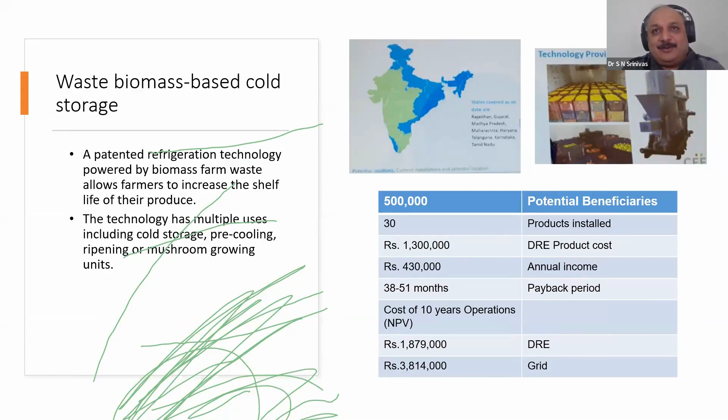There are quotes of 2.5 etc, but I don't want to get into that because that's really a killing price. Vendors will not make the profit. Vendors have to make profit for the product to continue, sustain, and business to prosper. So just killing each other will not help. In my view, it should be 3.5 to 4 rupees per unit of power, not really go below 3. Anyway, that's a different subject matter of debate and discussion.

Solar dryers are another big area because there are 2 or 3 important advantages of solar drying. Number one is you will have a lot of shelf life, so you can negotiate for a significant price increase. Second thing is you don't need energy cost. And most important is apparently it is nutrition rich.

Apparently there are quite a significant number of studies which have cited this. So solar dryers is a big area. Till now, 3,500 solar dryers have been put up.

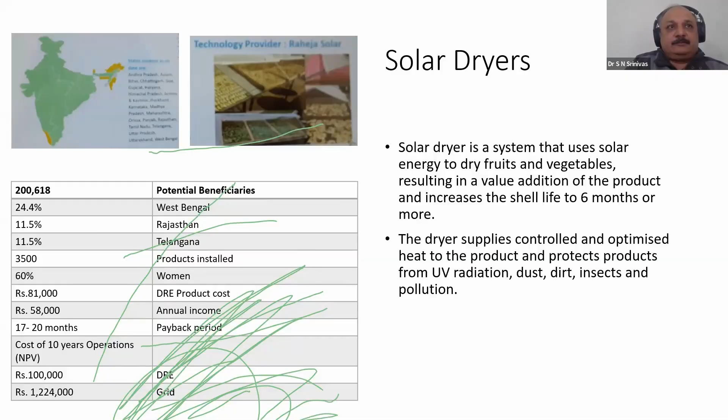Since it is a product typically in the thermal area - heat applications or cold applications - I'm a fan of this because the products are indigenous and fabricated in India and sold in India, which increases the employment opportunity and enterprise opportunity. So what you see here on the left bottom side is a dryer.

On the right side is an interesting thing. I bumped into this company called Trane Technologies. It's a big multi-billion-dollar US-based company which is doing space cooling for Walmart and things like that.

What happens typically is his or her day starts from 3:30 in the morning. They buy it from the wholesale mandi, and they have to sell this produce, particularly leafy vegetables, by 4 o'clock in the evening. Otherwise, it really you will not be able to sell it, and next day definitely it's not possible.

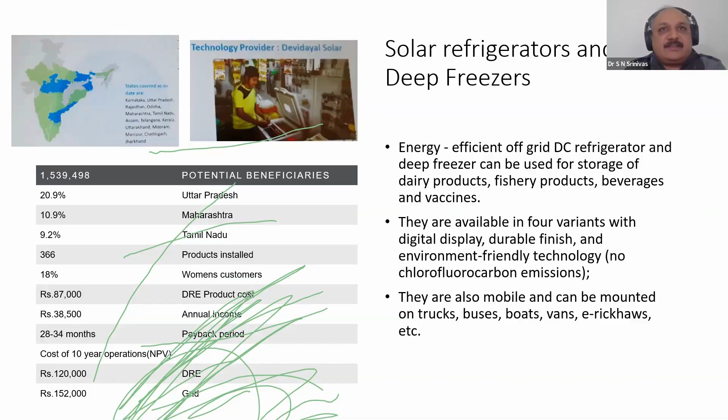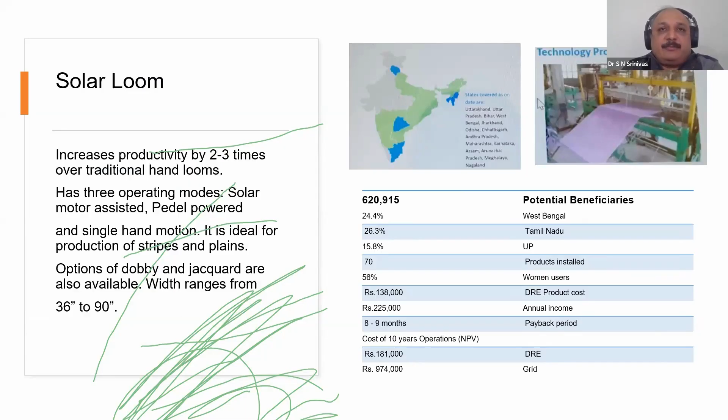Solar looms, we have a number of looms, right? Just Uttar Pradesh, Tamil Nadu, and West Bengal are the big states where 600,000 looms are there, and charkhas are another big number - it runs to tens of lakhs, which also can be solarized.

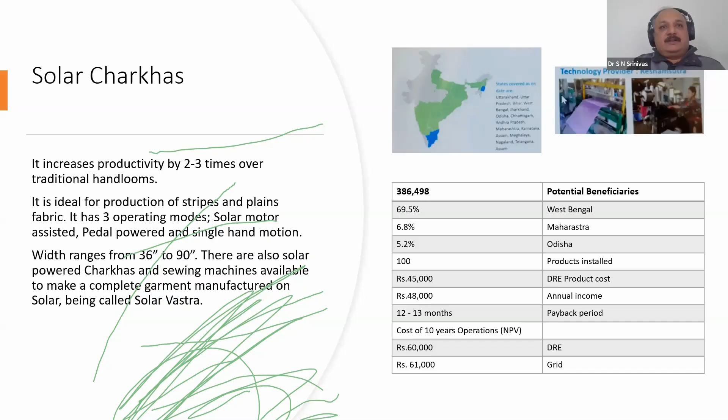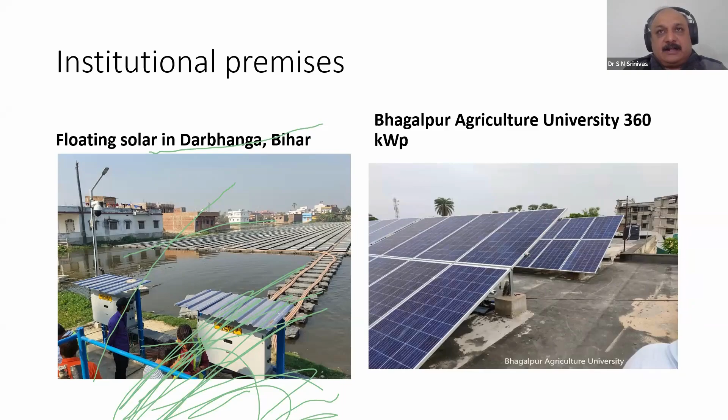If some people want to take up an enterprise, why not do institutional premises - you solarize them to take them to net zero. Or if you have a lake in your area, can we not do floating solar? Because in some areas, some states like Bihar, land is of prime cost, since there are very huge fragmented lands for farming. Given a piece of land, people would like to farm rather than put up solar panels like in Ladakh or in Rajasthan or in Gujarat.

Coming to thermal applications - generally whenever we say energy, we get into electrical. But if you take a look at total primary energy, all energy used, actually the heat applications, all cook stoves or industries using process heat, these together actually are 57%, whereas electricity...

The minute we say energy, we go to electricity. But we must be conscious of thermal applications, and that's where huge scope exists for smaller entrepreneurs, whereas electricity is managed by huge discoms and big companies, whereas heat applications, by nature, are decentralized and need smaller entrepreneurs.

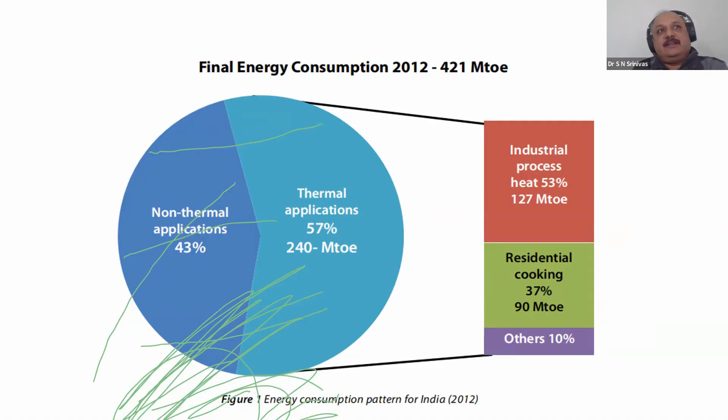India is blessed because of our nature of applications, nature of resources. We have tremendous scope for enterprise and employment around this subject, which is not touched, and also it's like virgin in a way - not much has happened. In fact, I'd say ministries still need to give a lot of emphasis on these applications.

Just take agriculture residue - we have a surplus of more than 250 million tons, and each entrepreneur can run a plant which is like 1 to 10 tons per day, so 300 tons per year. So you have so much scope for just this.

Just take the example of Surat. I was involved in a quick survey, making energy efficient boilers, a project through UNIDO. We were examining the boilers - what fuel are they using, what's the current efficiency? Since December last year, that is 2021, they've all shifted - almost 80% of the people have shifted from coal to briquettes.

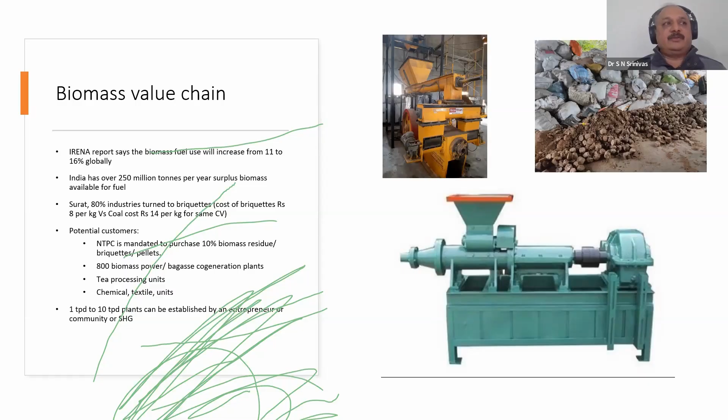Another big area is all that we waste. I would say we should really campaign for net zero wet waste - no wet waste should go from houses.

So yeah, here in Bangalore, one person is selling biogas digesters which take 2 kgs. Typically, a household of 5 or 6 people would generate about 2 kgs of wet waste per day, and if it's 10-15 people, it's 5 kgs. So he has produced them. Wherever there is a little bit of terrace, we should definitely convert either to compost or generate gas and use it to meet our partial gas requirement.

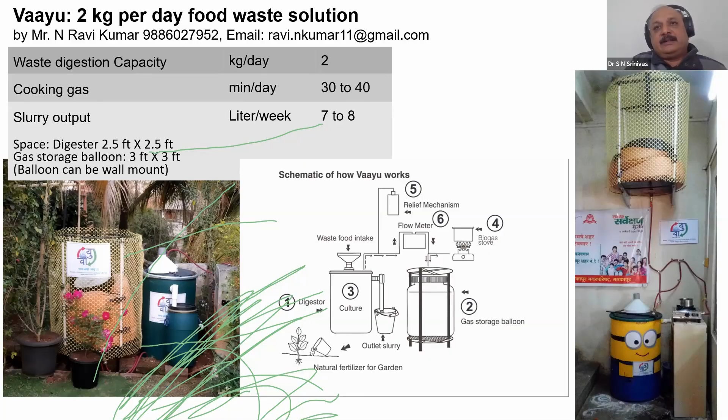Thereby we reduce there also. On one hand, we use the waste, we will not transport it, we will not create another pollution cycle, but on the other hand, reduce our LPG. So these are some of the pictures.

And as I said, improved cook stoves still have a lot of potential, and these are different models. In India, there are 125 different models, but still it's a big challenge, because a stove which is most convenient to the housewife, or whoever cooks for that matter, is still a mirage. So that's how you will see still a 126th model is coming.

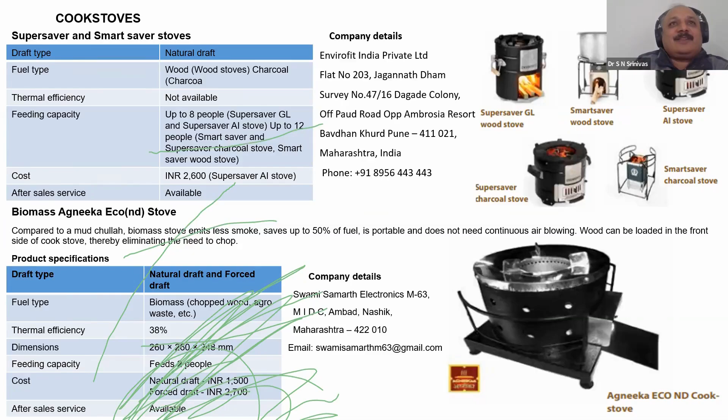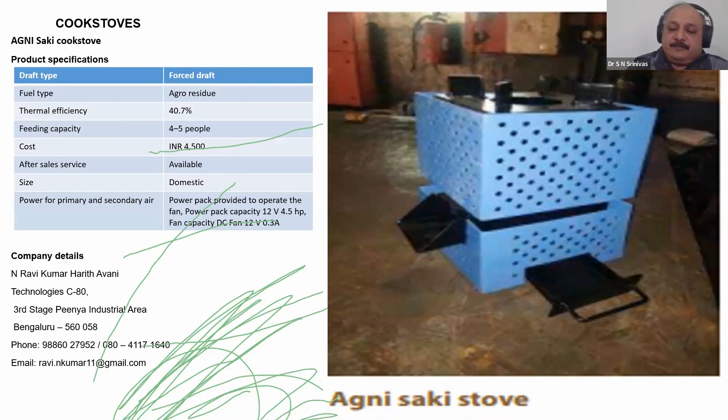And then another area is biomass gasifiers for heat applications. If you see here on the left side, the bar graph, these are a little old, but the ratio holds good. Many enterprises use diesel as fuel, electricity as fuel, wood as fuel, kerosene or LPG. If you use a gasifier, you can reduce it by 50%, and the graph very clearly shows how much you can save by burning the biomass in a reactor like a gasifier.

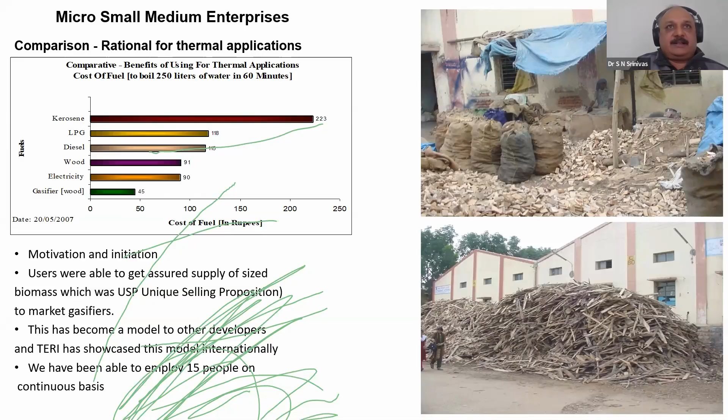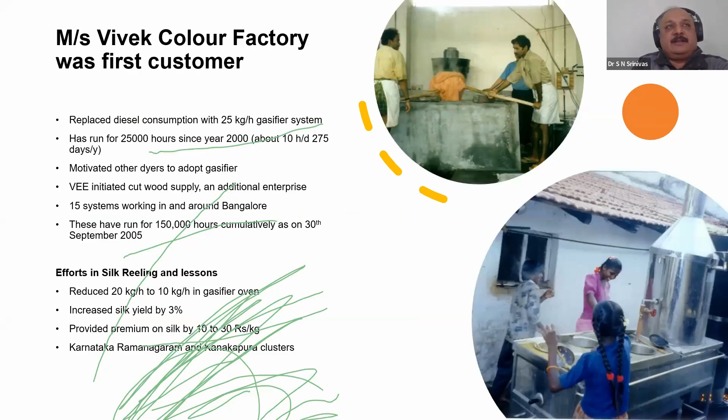Here are some examples in a bleaching unit, dyeing unit, in silk reeling units, where it comfortably reduces 50% of the biomass used. Even in a lead melting unit, condiments making, a series of uses.

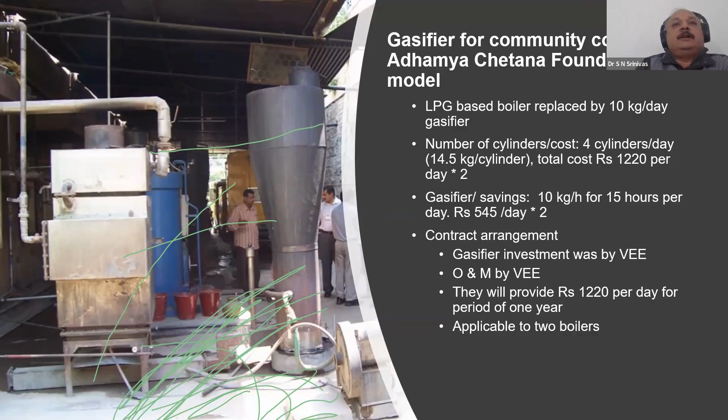In fact, in Adhamya Chetana Foundation, which was run by former member of parliament and minister Ananth Kumar's wife, they tried the first energy service company model, where they will not buy the gasifier, but they will buy the services. So you give the steam which they were earlier getting through the LPG. So you have an agreement to give the steam. So that kind of a service company was also piloted. So I'll skip this.

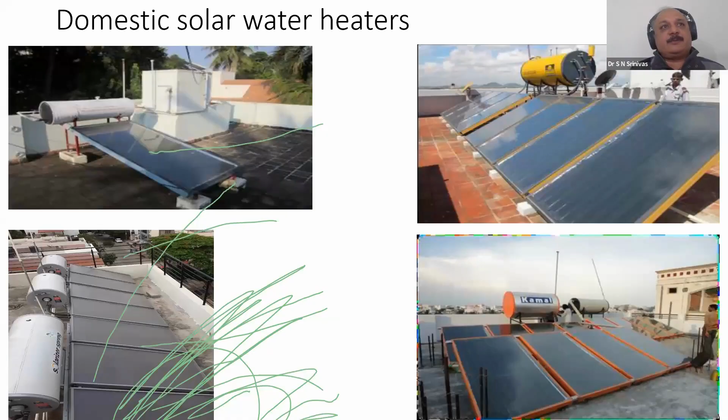Solar water heaters, you all know, but it holds a lot of promise. For example, Greece has 60% of all new installations with solar water heaters, whereas in India, the best is in Pune and Bangalore with just 15%. Greece is much worse in terms of weather conditions. We have much better, but our uptake is as of now so low. That means we have so much potential. It can take up thousands of enterprises and lakhs of people. Just this subject can engage them.

As of now, for solar water heaters in the country, we have just 20 million square meters installed, whereas we have 300 million houses. Each house can have 1 square meter. That means 300 million square meters is the least. And I'm not even counting the 60 million enterprises, MSME units, which can also make use of solar water heaters.

And there was a design also. I was involved in a design for the hilly areas, because they have to carry them as back loads. So this was designed particularly for that, but somehow it did not take off, but there is potential that it can be improved and can take off.

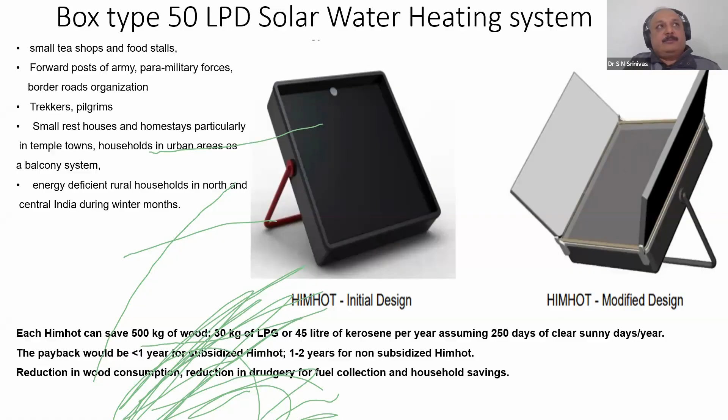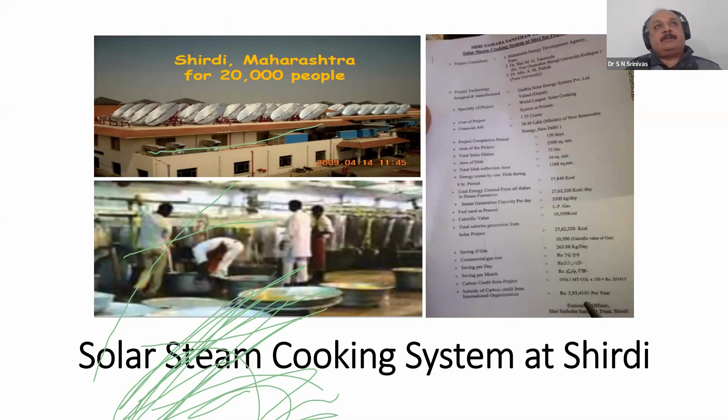So another area is solar concentrators. You would have seen these reverse umbrella shaped things with which you can produce steam over 80 degrees centigrade. Below 80 degrees centigrade is through solar water heaters. Above 80 degrees, something like this, which is solar concentrators. You concentrate the solar power for thermal applications. For example, Shirdi makes meals for 20,000 people using these solar dishes.

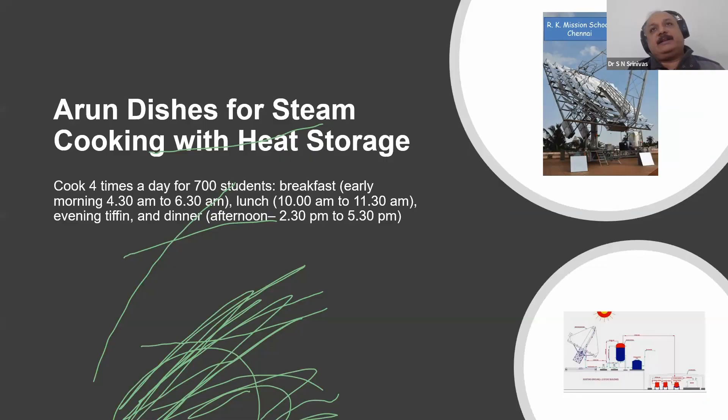And similarly, in Chennai, RK Mission, they have a steam storage system so that they can make meals. The first meal, they have to start at 4 o'clock in the morning so that they can serve it at 7 o'clock in the morning to the children. That is the first breakfast. So they completely shifted from LPG to a solar-based steam system.

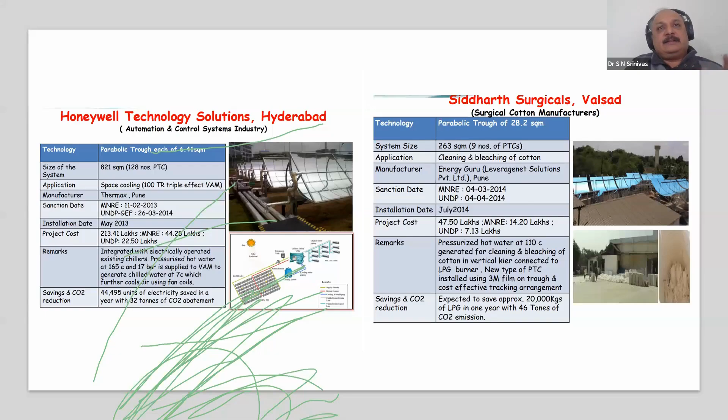So these are different systems. In every application there have been pilots, and a very useful push has been there for solar concentrators. So I'm not going into these details. We are just mindful of time.

Solar distillation is another. We have a number of areas. West Bengal, a good number of districts are with arsenic, and in Karnataka, 2-3 districts are with fluoride. Solar distillation units don't require any electricity, no other energy, just the sun's rays. You can convert the fluoride water into potable water.

In fact, you can even convert the sewage, almost sewage water, into potable water. And these houses, if we build them with all the renewable energy integration, you can actually make them not only net zero energy dwellings, but net negative, in the sense you can sell power.

I'm working with the World Bank in trialing this for Prime Minister's Awas Yojana, where 25 square meters of houses are built for the economically weaker section. Typically, the house which you see at the bottom. So even if you use 33% of the roof, the rest of the roof is available for other purposes. That is sufficient to meet it fully.

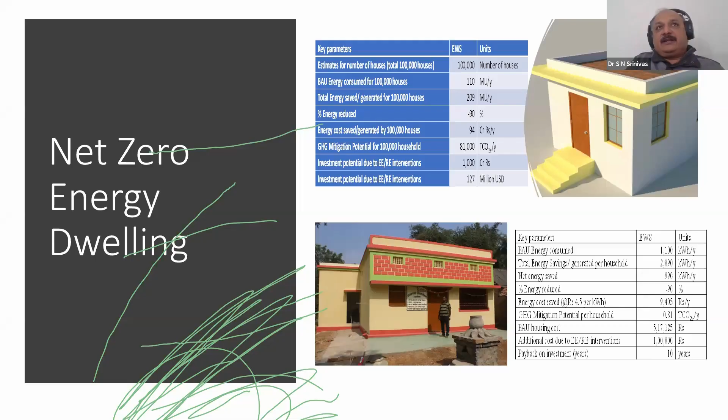If you see the table on the right side below, typically a house of this nature will consume 1,100 kilowatt hours per year, whereas they produce and save, by energy efficient appliances and other means, 2,000 units of power. So thereby you actually make it not only net zero but start earning. The payback on the investment is a little longer. That's why you would need financial support right now. But otherwise, the World Bank is going ahead with a pilot very soon on this.

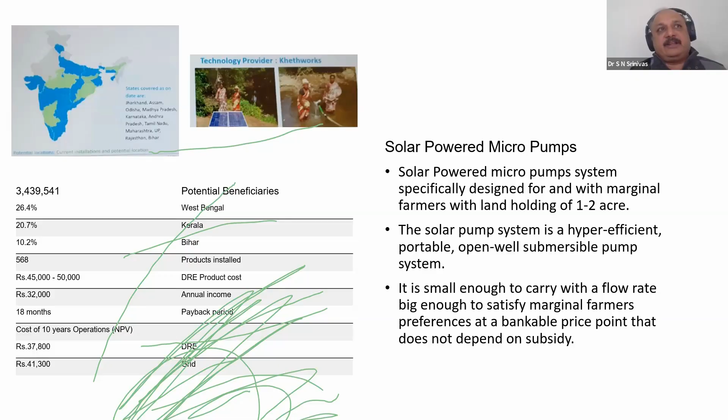Solar powered micro pumps. I don't understand why we are not really pushing this idea for each house, all of ours. We have normal pumps running. We don't need to fill up our tank in half an hour, 15 minutes. Let it take its time. Let's have a lower wattage pump that can keep filling up the overhead tank. There are some initial efforts in Odisha, etc., but for different purposes. They're using that pump for shallow water lifting for irrigation, small motors.

So I'm leaving these things with you. There are very good, useful 25 different 4 to 5 minute audio visuals, which you could go through at your convenience. They are all very interesting case studies. So let me just come to my last two slides.

What can we do at household level? We have 300 million houses. We can make net zero energy houses. We can make them energy efficient. We can make the solar roof. We can provide cooking solutions, solar induction stoves. I did not talk about it much though. Improved cook stoves, biogas plants wherever feasible, solar water heaters, solar pumps. It can be individual or collective. Zero wet waste, composting, biogas plants, smart metering so that people know what they're consuming.

Agriculture: 30 million electrical and diesel pump sets are there. Till now, only about 3 lakh solar pumps are put up. We have potential for 30 million. And at the SHG level or village level, we have 7.5 lakh SHGs and 600,000 villages. Mini grid, microgrid, common compost, upflow anaerobic sludge blanket reactor, so that we don't pass on our wet waste to the landfill or the rivers. Solar pumps, solar street lights. Every panchayat typically has 10 to 15 lakhs as grants, and 50% of their grants are spent on electricity bills. We can make that net zero.

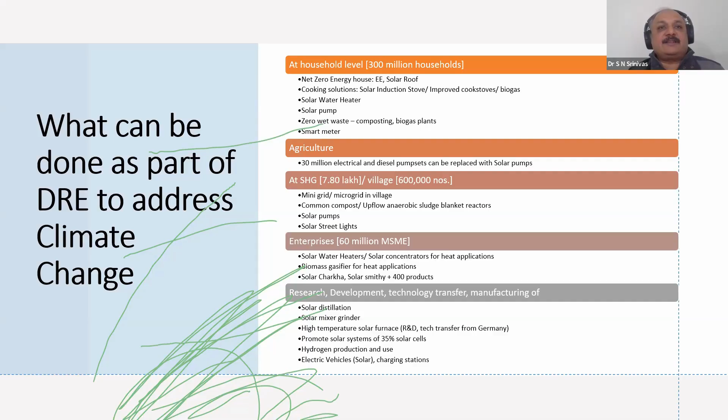And we will soon probably have better solar cells. Right now we are running at 17 to 20% efficiency. We are definitely going to go up to 25 to 30%, if not 35%. What happens with that? Whatever I said, if you use 33% of the roof, you can make it net zero. That will just become 20 to 25%.

And one important thing that Davishna wanted me to cover is, where are the resources? We have to look at blended financing. International funds are there for piloting and trialing something new. Green Climate Fund: until now, globally, $30 billion has been mobilized. Global Environment Facility: 4 billion per cycle of 4 years, and 6 times is the co-financing they look for. Global trust funds like Rockefeller, Ford Foundation, Clinton Foundation, UN agencies. In India, there are 27 UN agencies, and there is now the new Just Energy Transition Partnership.

Indonesia got $20 billion. India is now the G20 president; they would look for $100 billion for sure. CSR funds: public sector is 3,000 crores per year, private sector is 7,000 crores per year. Not necessarily only for energy, but energy is one of the 14 thematic areas here. And the National Rural Livelihood Mission and State Rural Livelihood Missions, where we can amalgamate DRE systems.

Subsidies: the central government still gives some financial assistance, which is called central financial assistance. State subsidies are there. For example, Uttarakhand gives for making use of pine needles. If you make pine needle based briquettes, you get a lot of financial incentive, fiscal incentives, loans. That's important. Small Industries Development Bank of India, Indian Renewable Energy Development Agency, KfW, German Bank, Asian Development Bank, World Bank.

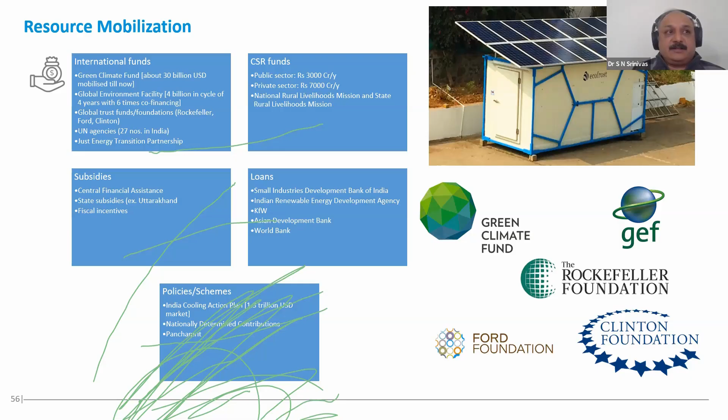India Cooling Action Plan, as I said, they identify a huge market. It will only roll out in the days to come. Clean Energy Access Network gives you a compendium of 100 plus renewable energy products, particularly decentralized renewable energy. That's one agency which actually focuses on decentralized renewable energy. And recently, on the 9th of December last month, Parliament has passed a bill, net zero. I don't know how many of you actually rolled your eyes on it.

Net Zero Emission Commission. They are going to have net zero emission councils at state and district level, and government has asked annual reporting to be tabled to Parliament. That means there is a serious job that they are considering towards the coal phase down and towards net zero emission. So I end my presentation here.